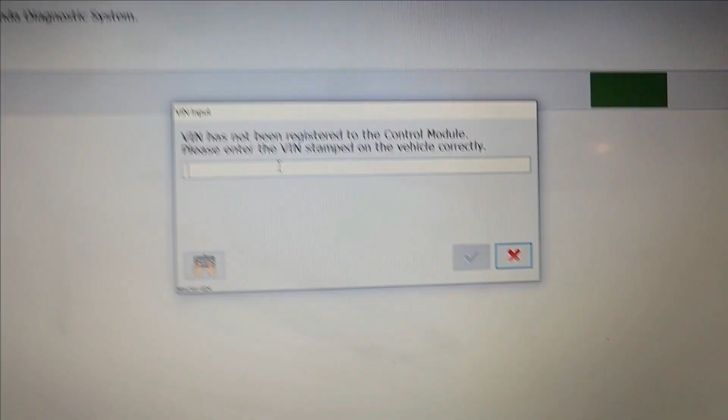So once we're connected, I'm using this Honda SPX VCI, and it will say, just because it's a new module, that it wasn't able to detect any VIN number. We're gonna have to type in the VIN number. Alright, just type the VIN number, hit next. The entered VIN number will be registered to the control module. Please confirm. I did confirm it. Next.

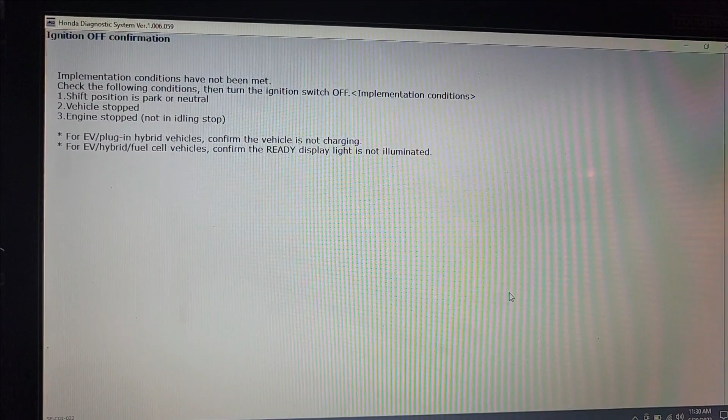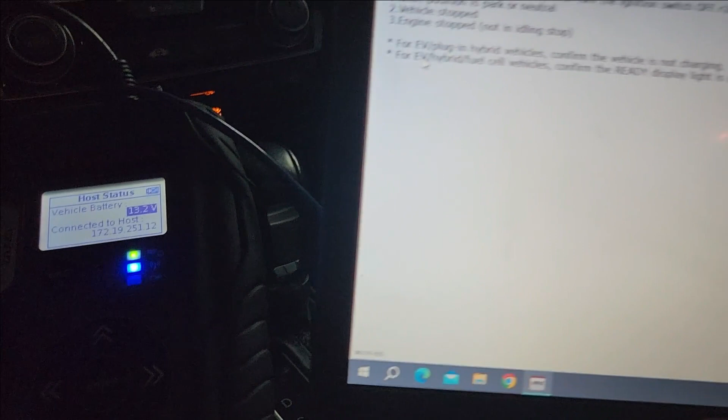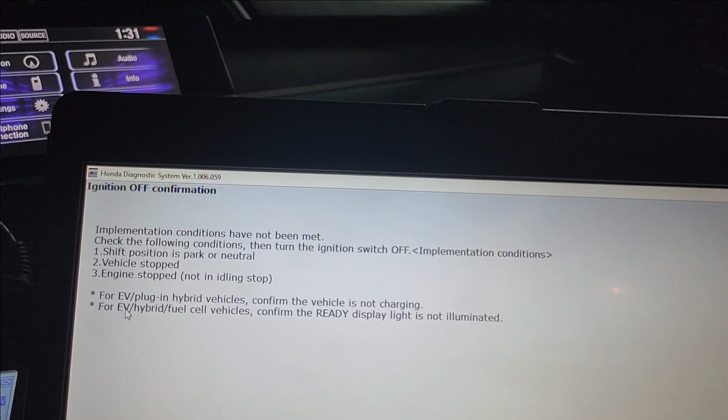Implementation conditions have not been met. Check the following conditions, then shift position to park or neutral. It is. Vehicle stopped, engine stopped, not in idle stop. Yeah, the vehicle is in park. And check the following condition, then turn the ignition switch to off. Okay, condition confirmation, turn ignition on. Okay, ignition on. I do have a maintainer also.

VIN registration failed. Interesting. Let's check it out. Sometimes it does register, but it just throws that failed. Okay, so my VCI needs an update. There is a firmware update on that. Let me punch in the VIN. Okay, yes it is. Engine is running. Interesting. Try again. The engine is not running. I don't know why it's detecting engine is running, and that might be the reason why the previous step failed.

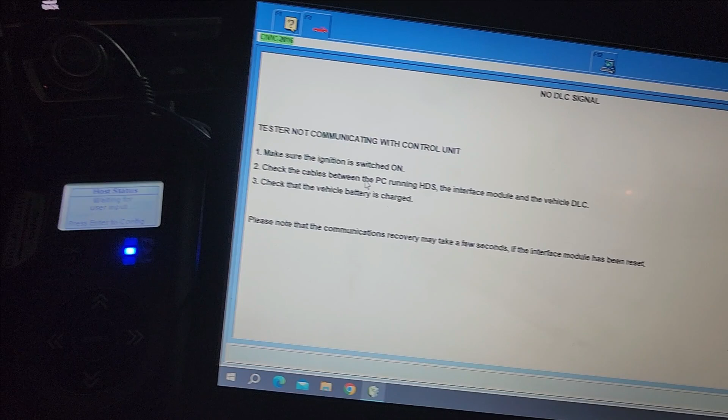That being said, engine is running. Okay, let's try just one click, enough to wake up the car. Does not communicate to control module. Make sure the ignition switch is on. Yeah. Cables between. Okay. Ignition off. On.

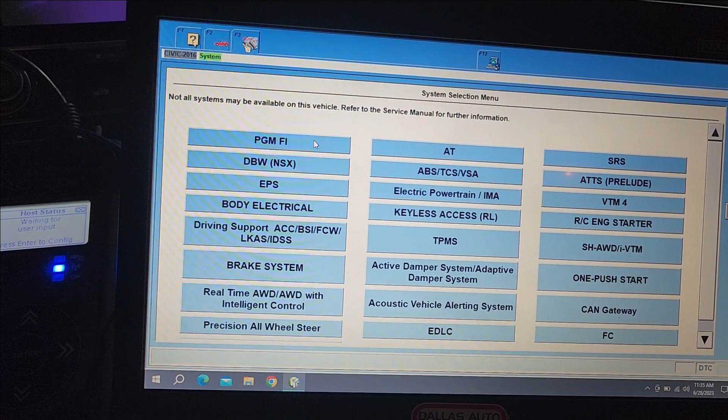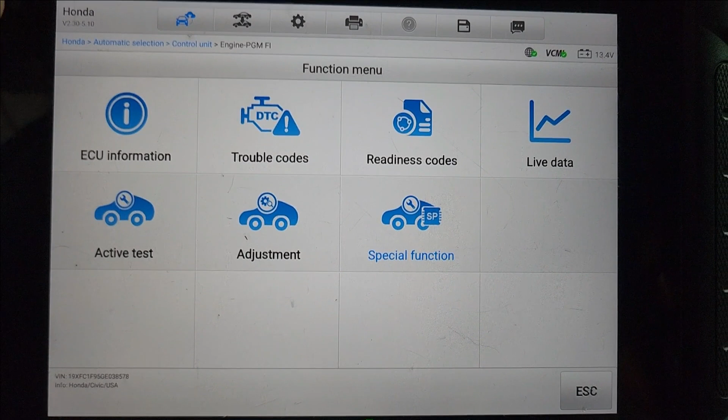Okay, we're in, so we're going to go to Honda Systems. Engine. Click OK. Vehicles are no longer valid. Yeah, something's going on. Let's try aftermarket tools. I'm gonna try with the Autel. All right, I'm here using the Autel now, and it didn't detect any VIN. I had to put the VIN manually. I'm in the engine control module, go to special functions and VIN check.

It says the entered VIN will be written to the new PCM. Okay, I have to enter it one more time. I need to stop. Click OK. Correct VIN, yes. Complete. See, Autel did it, i-HDS didn't do it. Isn't that crazy? It is crazy. Okay, now we're gonna have to

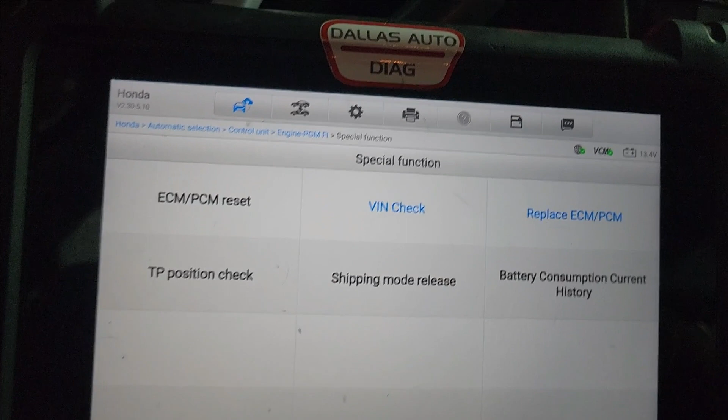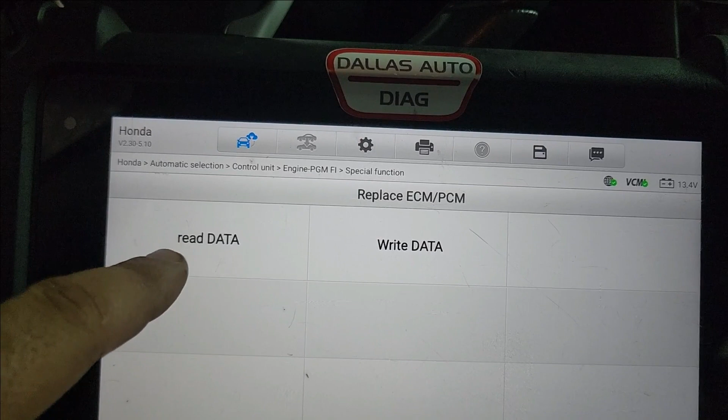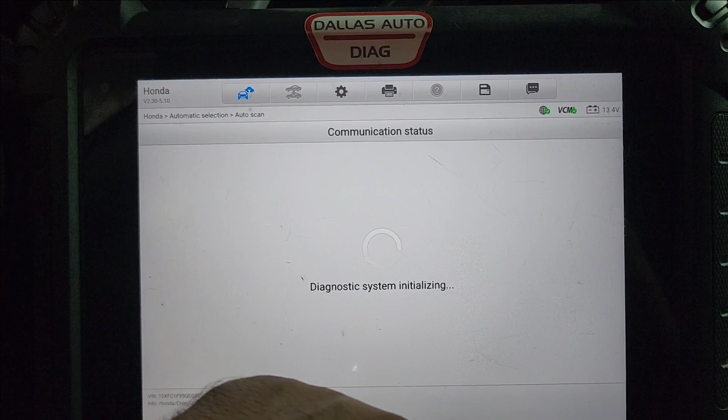replace ECM/PCM. Do not execute this function unless you are replacing an ECM. Next step, otherwise press OK. Do you want to continue? Yes. Okay, it was supposed to read data from the old PCM and now write it, but I think this is the oil change data, some information not necessarily needed. There should be another replace ECM function. I'm not sure if the 919 will have it or we should grab the 608, but we'll try it.

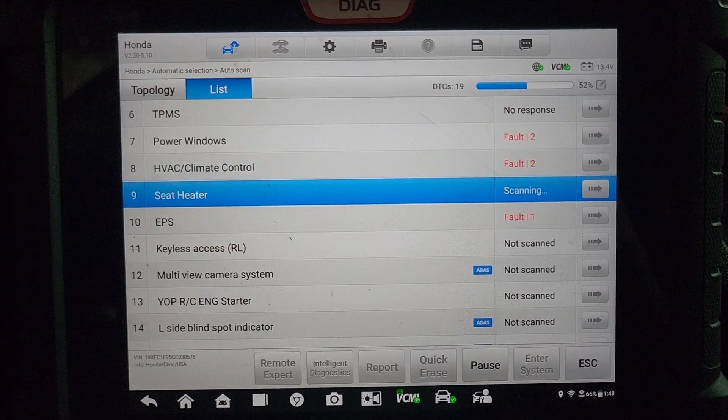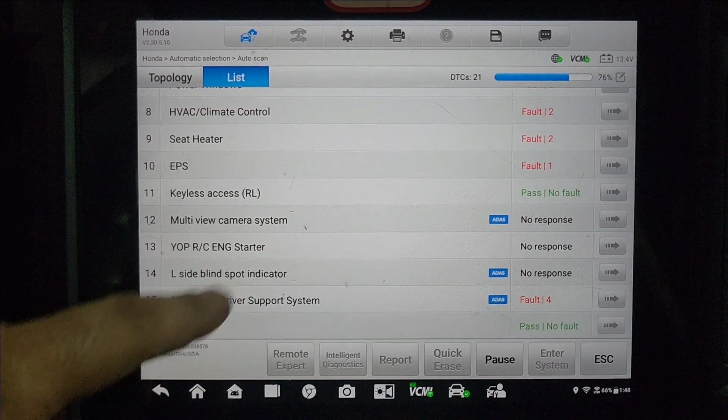I'm gonna pause and scan all vehicles. It's gonna take some time. Well, it's not. All right, let's keep going. There should be, I think, keyless access right here. There is another step that we have to do to make that security light flash and go away. Interesting. Immobilizer maybe, because the keyless has no fault, both of them. Yeah, still.

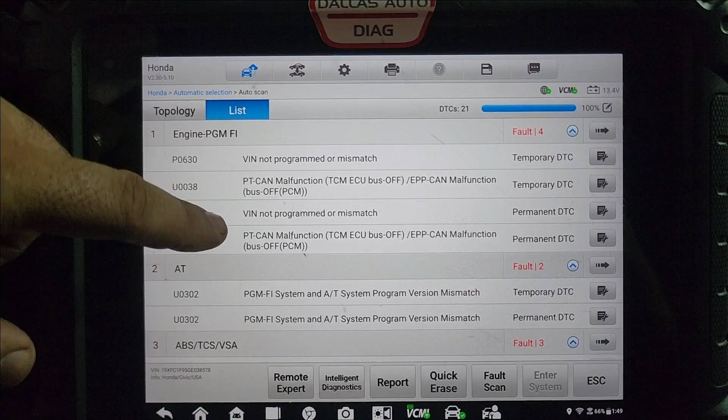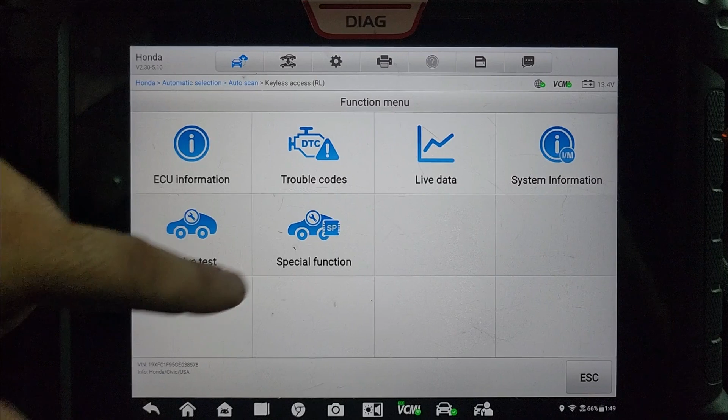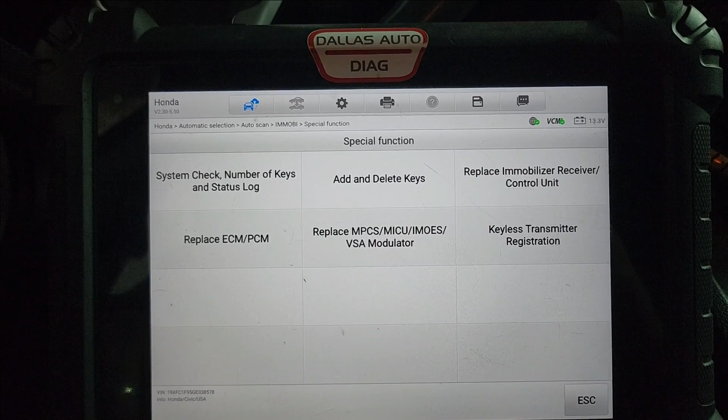Okay, let's go to keyless access, special function, registration. Access remote, no. Let's go to Immobilizer. Okay, yeah, I think it's in Immobilizer, should be here. Immobilizer setup. Special functions. Replace Immobilizer receiver control unit. Replace ECM/PCM right here.

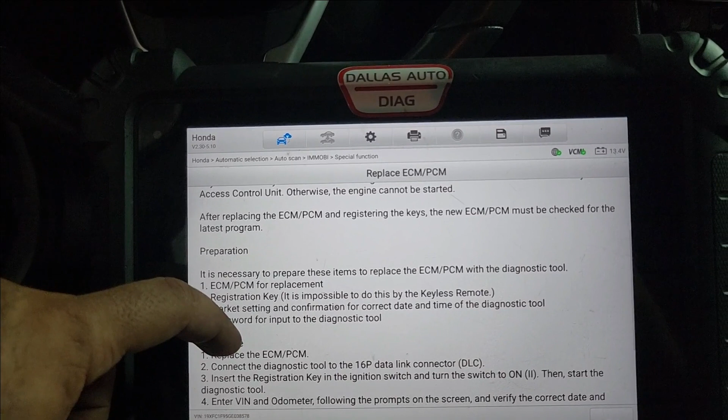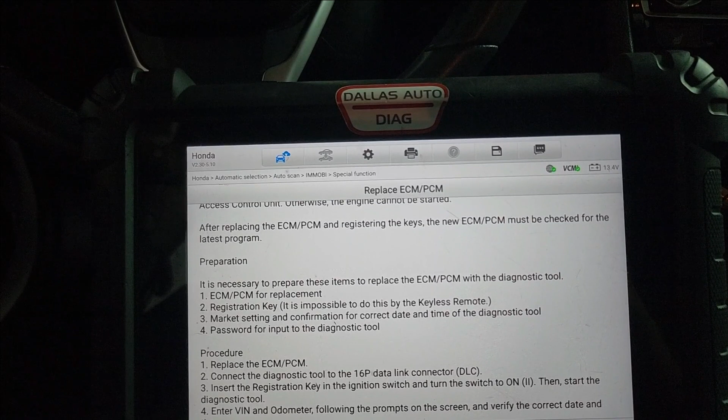Okay, this function does the necessary registration when the ECM/PCM is replaced. When the ECM is replaced, it is necessary for it to be recognized. You guys can pause and read. Registration key. Market. Password. We might need a PIN for that. It's a 16. Let's see. Selection menu. Replace ECM Immobilizer. Follow the on-screen, so ignition off. DLC. Okay.

I've done two recently. The new body Honda Civic had a problem using the 608, and then Autel updated the tool and I was able to go back to the job and finish it.

The other one was, I believe, all keys lost. It didn't have a key, came from the auction with no key. Turn switch off. It's off now.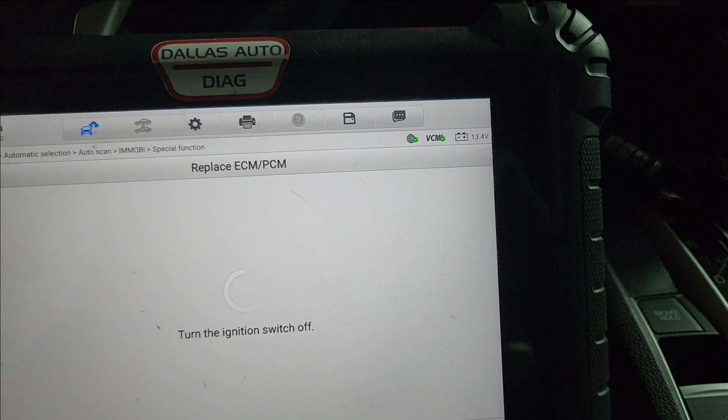Ignition on. Okay, the security light is still flashing. Registration immobilizer code, immobilizer unit has been completed.

Turn the ignition switch to off. Check all keys, ensure each starts the engine. Okay, turn the ignition on. Okay, and the immobilizer light is off.

We still have one issue, the blinking of the transmission indicator. We're gonna have to see what's wrong.

Keyless access before. Selecting yes, remove the immobilizer key from the vehicle remote place.

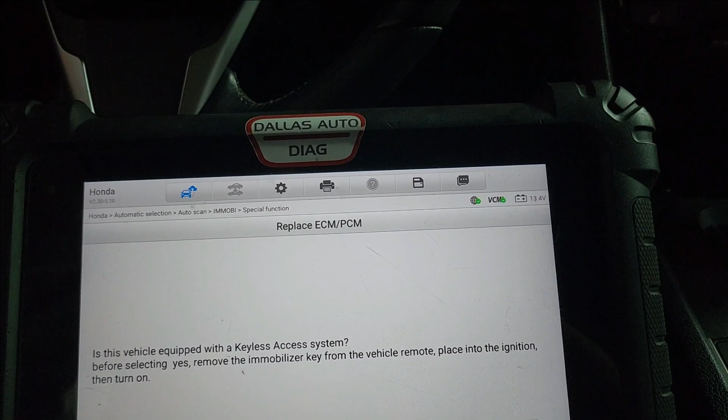Okay, I'm gonna have to hold. Remove the immobilizer key from the vehicle remote. Place into the ignition, then turn on.

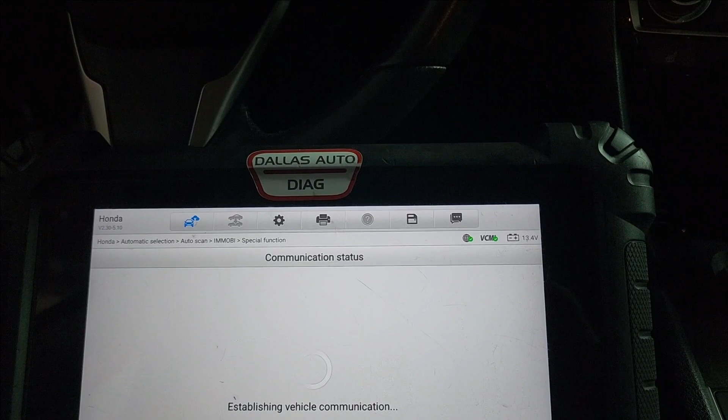Okay. This is immobilizer code into the keyless access ECU. Okay. Installation of keyless access has been completed.

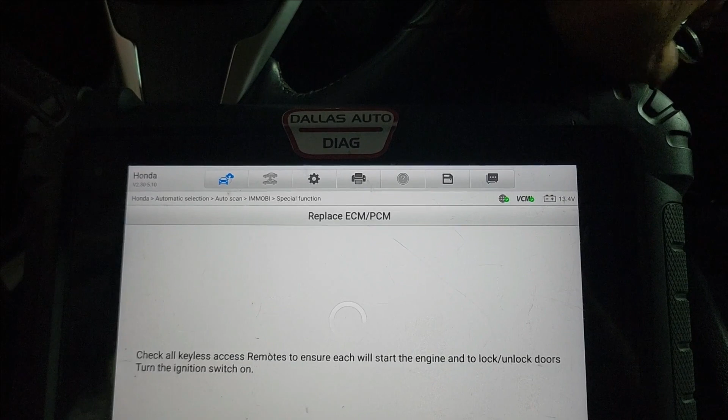Turn the ignition to off. Check all keyless access remotes to ensure. Okay, they lock and unlock. Turn ignition to on.

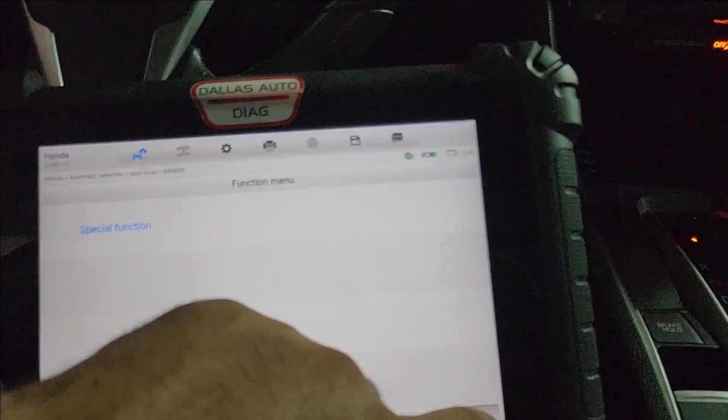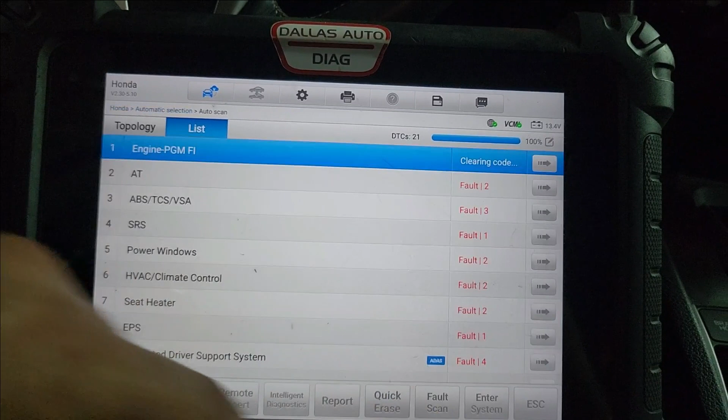Okay, now we have a piece here. Once I deleted the code in the automatic transmission, it went back to blinking again. We have something going on with the transmission.

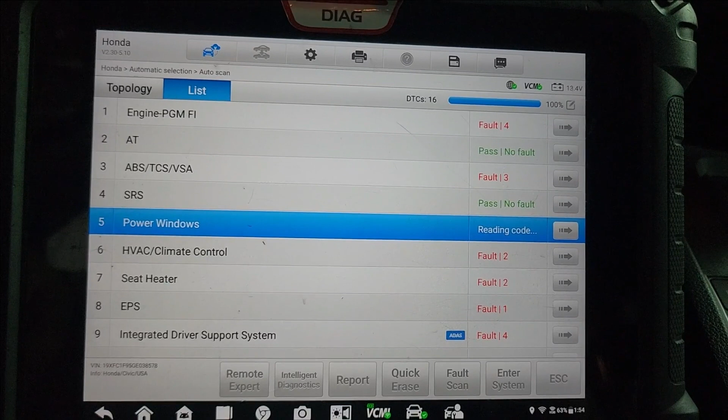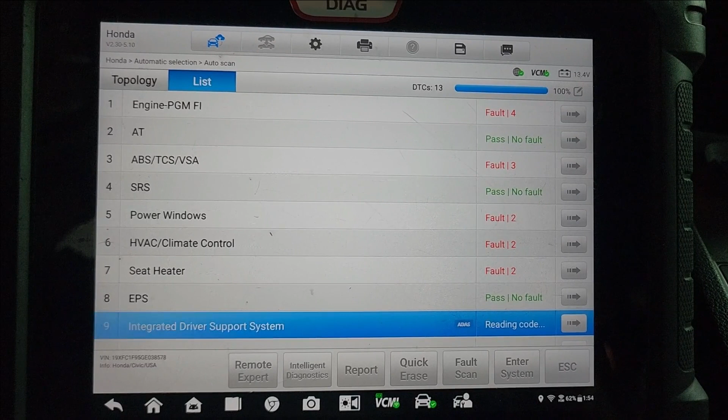By the way, the history of this vehicle, it's a flood vehicle.

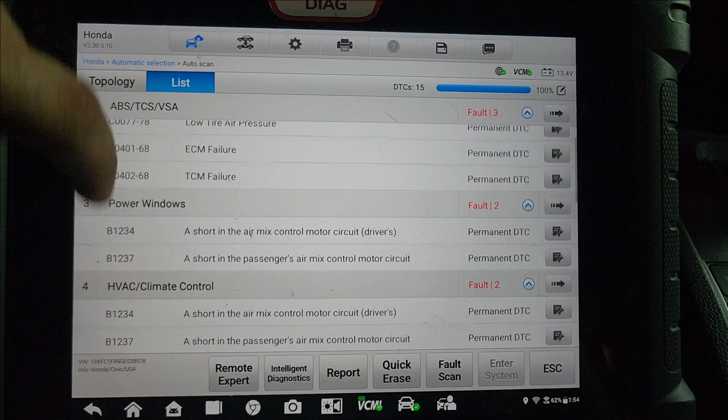Okay, we still have VIN not programmed or mismatch. I think this is gonna go away when we let the car go to sleep. But we have transmission control module, automatic transmission.

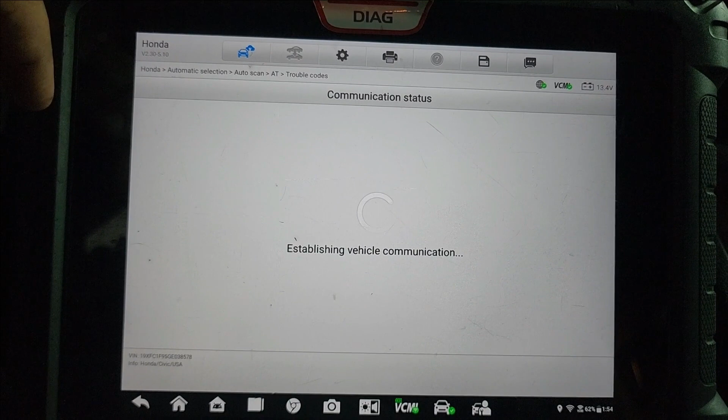Let's go to the transmission and do a code scan. Okay, we do have a code. PCM and automatic system program version mismatch.

Interesting. Now we're gonna go back to I-HDS. I didn't turn it off, right? Okay, we're gonna go back to I-HDS and see if there is any update on that engine control module we just installed. Let's see if this time we're going to detect any VIN.

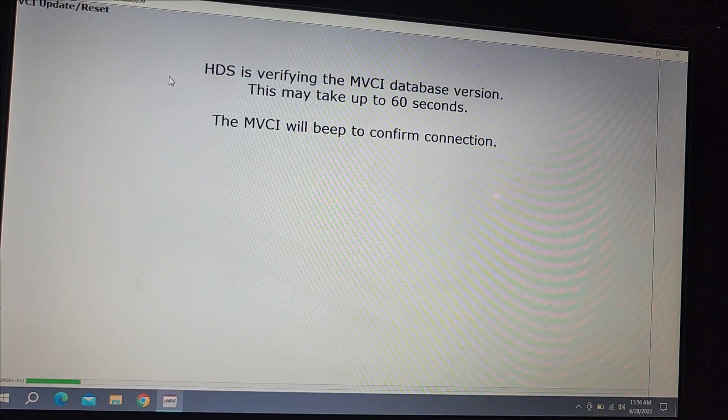Connect the vehicle. Interesting. It's not able to read a VIN.

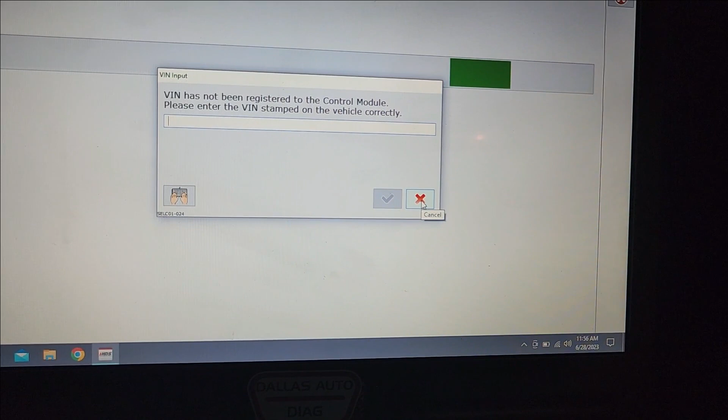Okay, let me connect the Autel again and see if it will read a VIN. Okay, let's auto detect. This is too long. Once it passes 5 and it doesn't detect any VIN, I don't like it.

Why did it say VIN registration successful, complete? Interesting. Yeah, it didn't read any VIN.

Okay, how about this? I'm going to plug the old one and do read data, plug the new one and do a write data. Old one is plugged, here's the new one. Let's go read data.

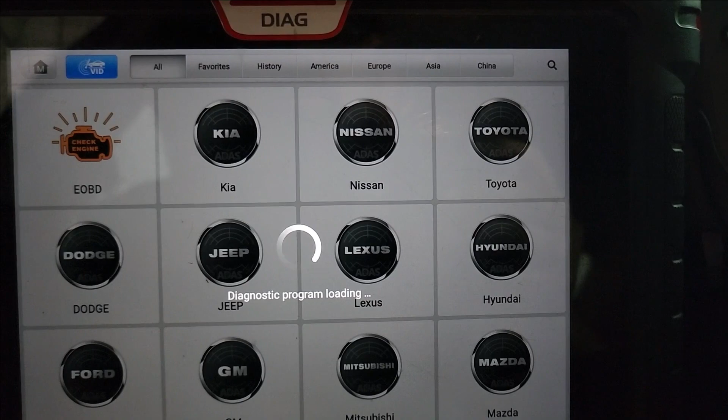Okay, this one detected the VIN number. Yeah. Okay. It's a US VIN. Okay.

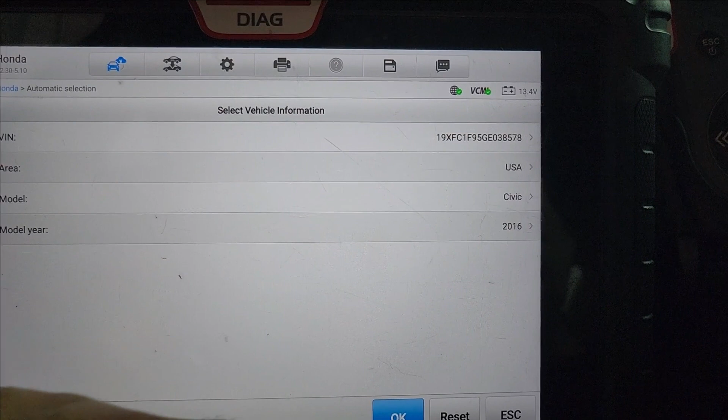Okay, control unit, this right here. See, with the old one the P is not blinking because it's not detecting any difference in the software. Well, it's not a difference in the software, but just because there's no VIN number in the engine control module, that's why the transmission is upset.

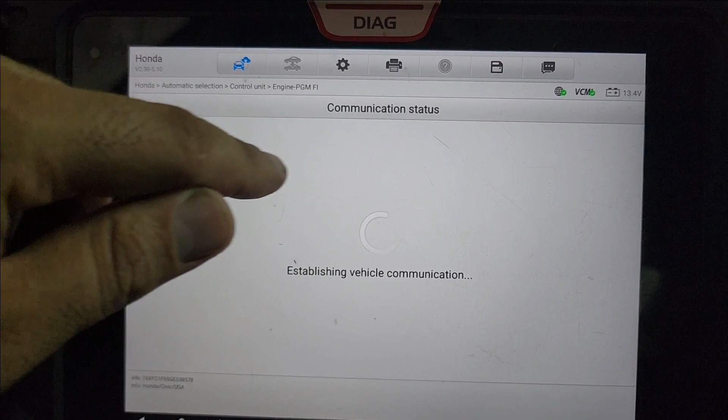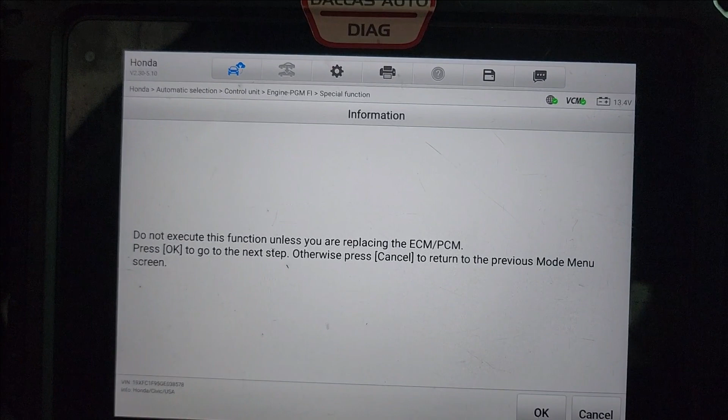Let's go to special functions. Let's do, which one was it? Replace. Yeah, it's continuous. No, not right. Read.

See, yeah, it is just the engine oil life. Yeah, I knew it's nothing important. To what are we doing?

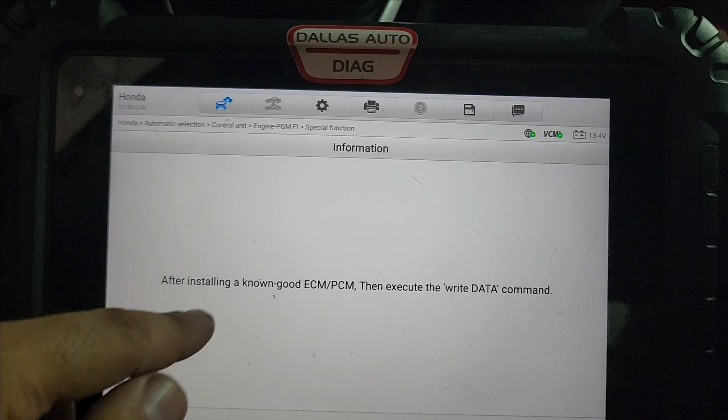Installing known good, then execute the write. Okay. Let me plug in the new one.

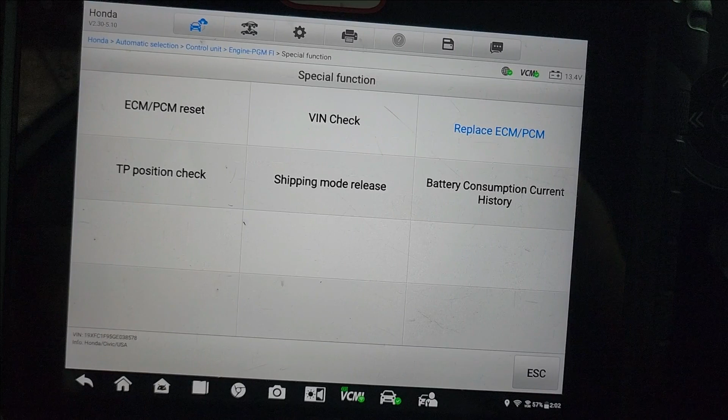Alright, so I hot swapped it, which means I didn't go out of my software and detect the vehicle again. Let's see if... Okay, let's go and write data.

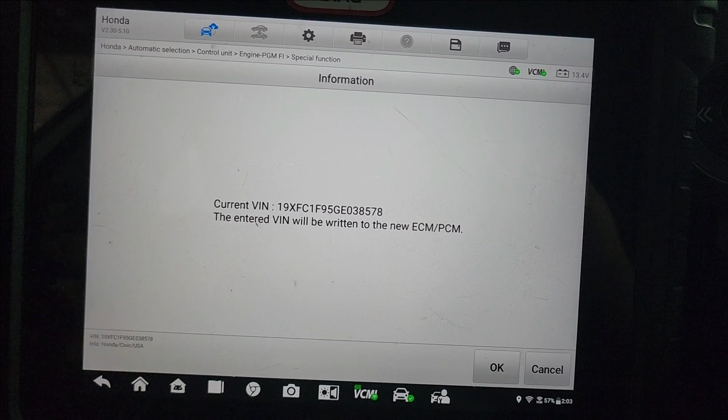VIN check. Current VIN will be written to the new ECM. Let's go cancel. Let's go ECM reset. Yes.

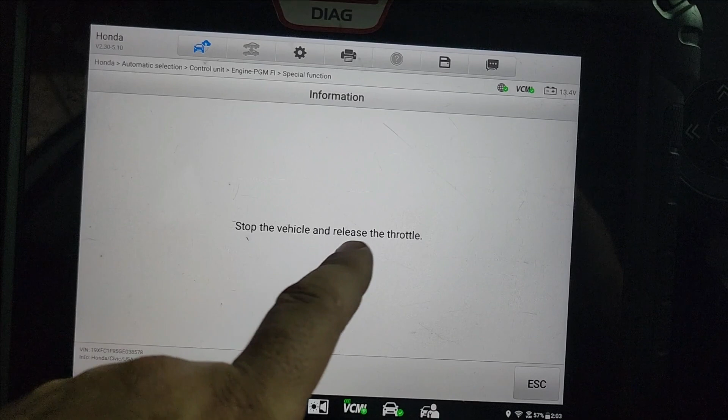Stop the vehicle and release the throttle. Interesting. It's not... I'm even feeling the gas pedal to see if it's pushed somehow. This is the problem. The car is detecting that the vehicle is running, the engine is running. Stop the vehicle and release the throttle.

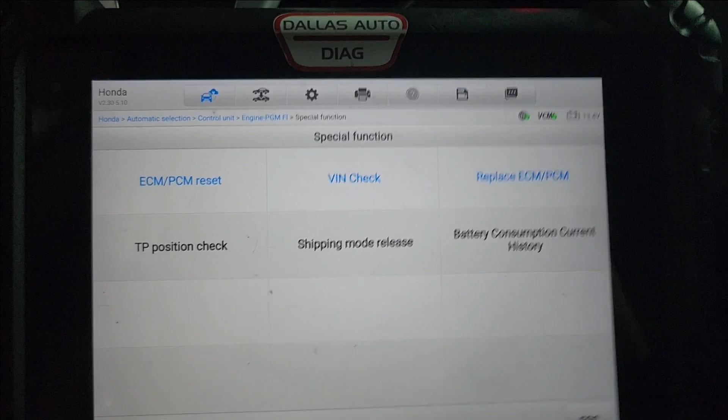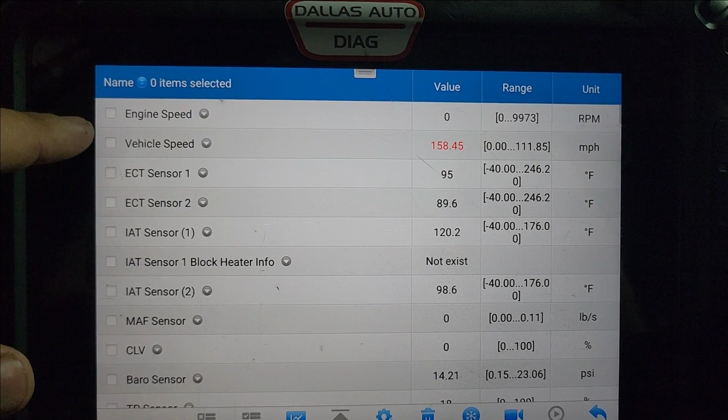The car is not running. Let's go back here, let's go to live data. Vehicle speed, interesting. That's why this should be 0.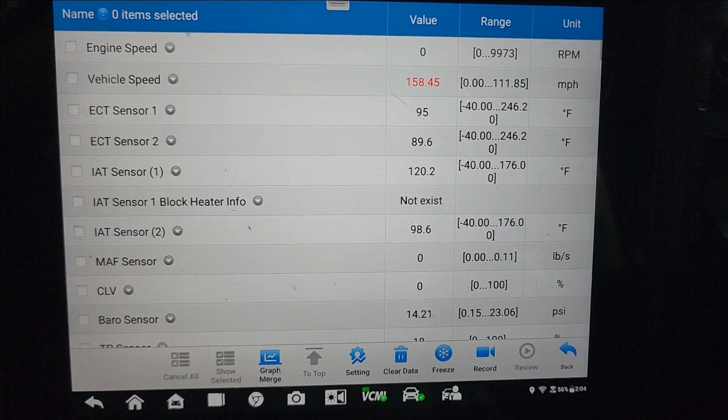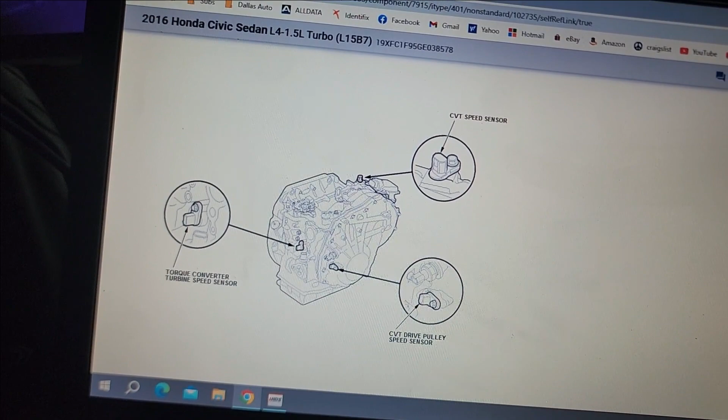This is a problem. Let's see in this vehicle what reports that speed to the vehicle. I couldn't find a system description that tells me which one is reporting the speed, but we have 3 speed sensors. One is a torque converter. It's a CVT transmission, by the way.

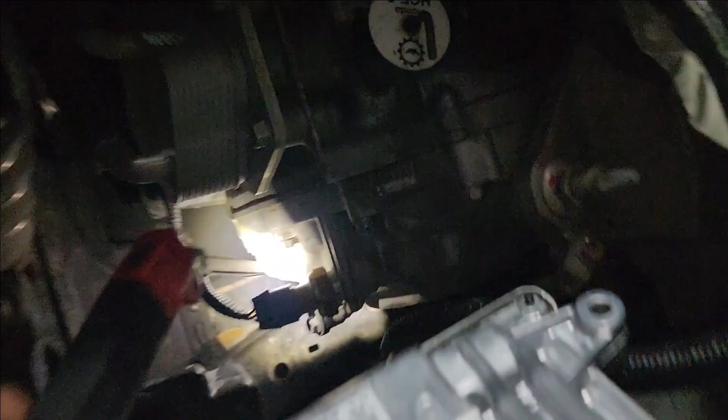This vehicle has. So what I'm going to do, I'm looking at the live data and disconnect these sensors, see which one brings this to 0. The torque converter speed sensor right there, and the other sensor is under this fluid temperature sensor. It's right there, and the third one is somewhere over there.

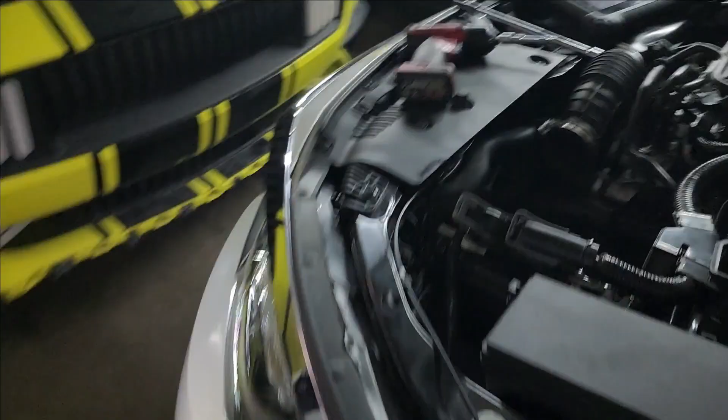I unplugged all 3, and I do have the key on, right? Yes. None of them brought this to 0. Vehicle speed. More digging, more reading needs to be done.

Even disconnecting the transmission control module, which is right there, doesn't bring this vehicle speed to 0.

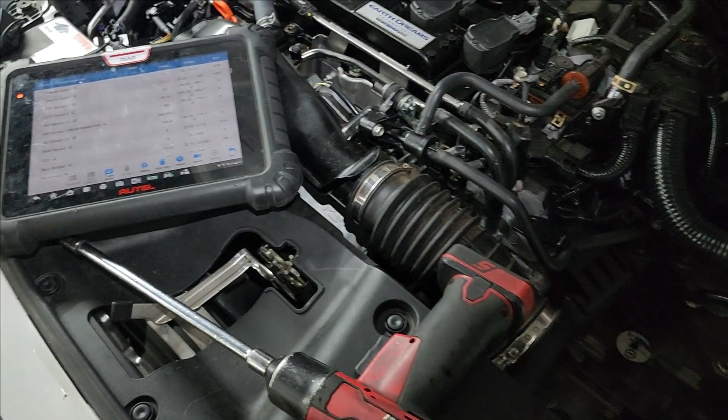Should we go back? I mean, no, I just talked to the owner and I told him the situation. I'm gonna plug in the old one and see if that...

Vehicle speed is 158. If it is, I know it's the car side. If it's not, it's the PCM. That's the PCM. Let's go.

Actually, we can do this right now. Turn the ignition off.

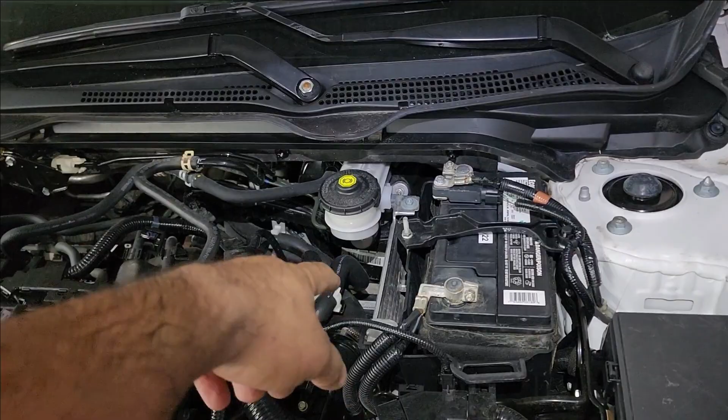Now, the other problem is I cannot program this one, I cannot write a VIN number while the TCM is unplugged. I think we won't be able to detect park or neutral for us to do that.

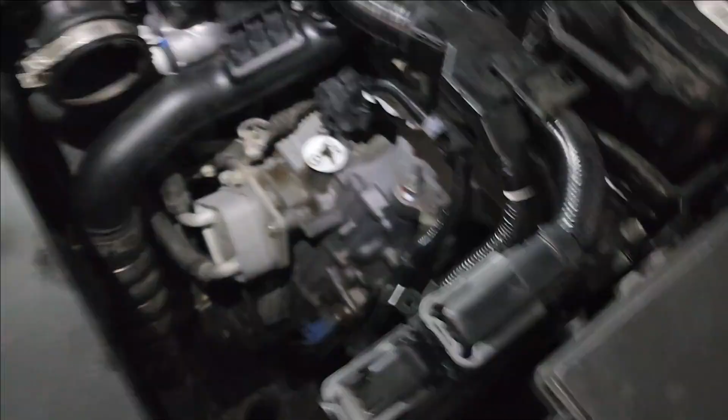But I'm trying to do this with one hand. Hold on. Okay, the old one's plugged in. This is the new one. We lost our readings, of course. Let's go put the key on.

You won't get key on because we have power. Okay, but no, I think the transmission control module needs to be plugged in. Let's plug that one in. Okay, plugged it in.

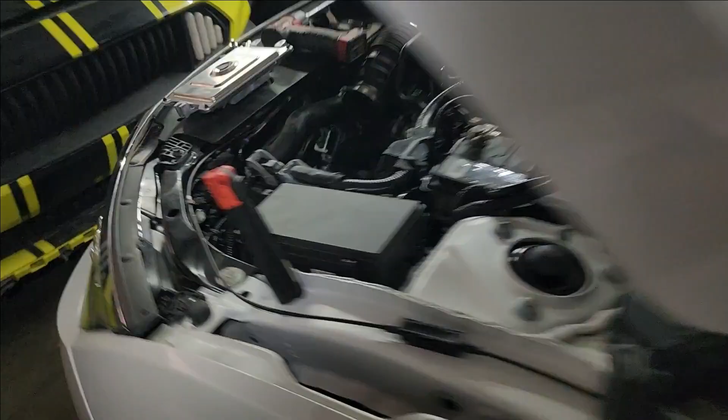But no. Interesting. Let me see if there's a battery. Okay, this is weird. All I did is got in and pressed it correctly. Okay, it's 0. God damn it.

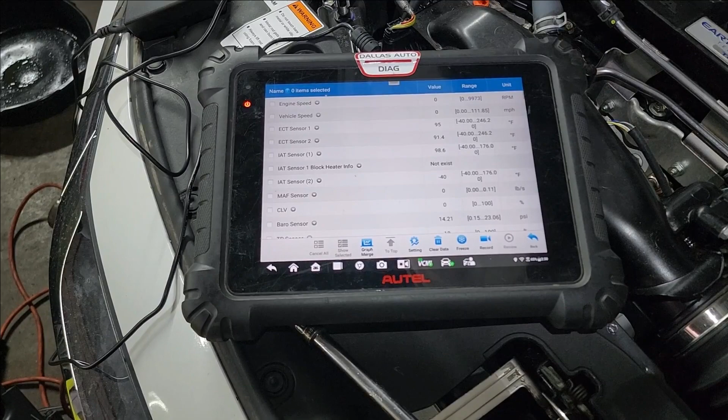All right, let me go deliver the bad news. Well, before we do, let's do it one more time and see if that will change back to 158.

So right now we have the original PCM. This is the new one, original PCM on, and our issue is we're not able to write the VIN number to the new PCM. The reason why is because the software is detecting the car is moving. There is a vehicle speed, and when I go to live data, I found a 158 value in the vehicle speed. When I plug in the original one, I see the vehicle speed is 0. Let's go plug in the new one, the one we haven't written the VIN number to.

Now we're gonna key off. We're going to open this up, bring this here, try to do it with one hand. Hopefully I can. I don't want to stop the video, so I'm gonna sit it like that without stopping it. I know you guys probably won't see anything, but just be patient with me.

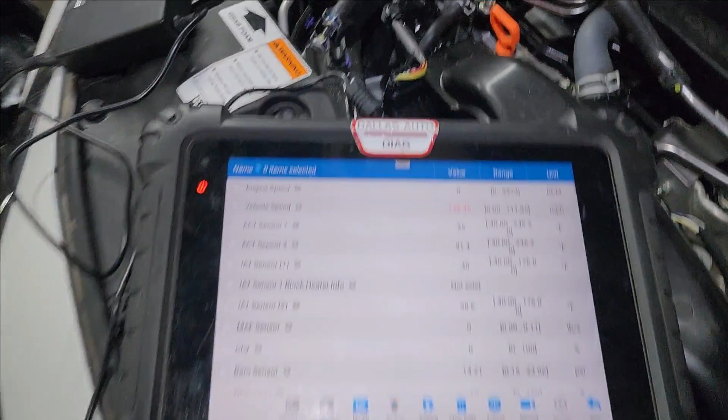Right here, the new one is plugged in. We lost the values because the key's off. Let's go key it on. Key on. And unfortunately we have a 158 value in the vehicle speed. That's why we're not able to write the VIN number, because it will tell you that the vehicle is moving.

We need another PCM. I just briefed the owner. Unfortunately, they're gonna have to take it back, and luckily I have everything recorded. It's gonna be a tough battle between him and the dealer. Forgot to ask him how much it is, but I'll ask him and I'll put it in the video as a text.

But yeah, we're gonna need another PCM to program and make sure that our initial issue with the fan is gone. Thank you guys for watching. Please stay tuned for the final repair video for this vehicle. Hopefully.